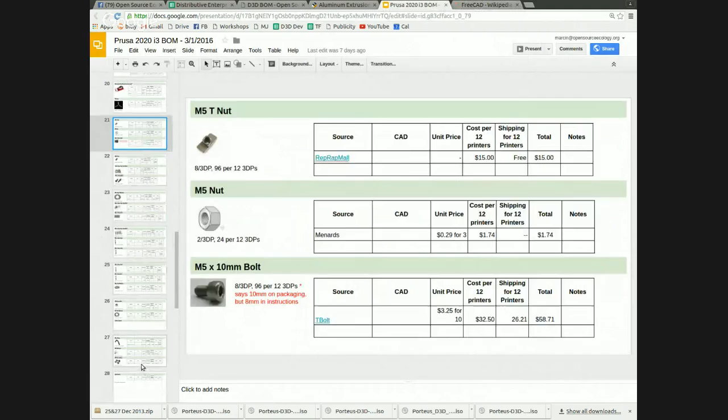So I just installed FreeCAD 0.16 today. Okay, here's FreeCAD 0.16. We can take the CAD files and import them into FreeCAD. A STEP file, for example, works, and then we can manipulate them. Like if we have the actual files for the extrusions, we can shorten them, lengthen them, rotate them until we end up with a frame.

So that's very useful. We actually have a very technical design available if we download the file from the internet. So in principle, whenever we can, we should not be trying to draw our parts by ourselves. They're primarily all standard commercial parts, and then when we start designing custom things like various sheets, we can insert them into FreeCAD. If you look at Wikipedia, FreeCAD is getting to be quite a decent package.

And for the collaborative activity to happen, access to an open source platform has to be there because you want everybody to collaborate. That's why we want to use an open source package. One thing we're going to do for the 3D printer and all the other machines is create workbenches within FreeCAD so that average people can get involved meaningfully in a design process where we develop the different modules, and those modules can be used within FreeCAD to do the design work.

I'm booting up FreeCAD here to show you how it looks. Let me look at that window there. All right, so I'll show you my entire screen here, but FreeCAD, get started with it.

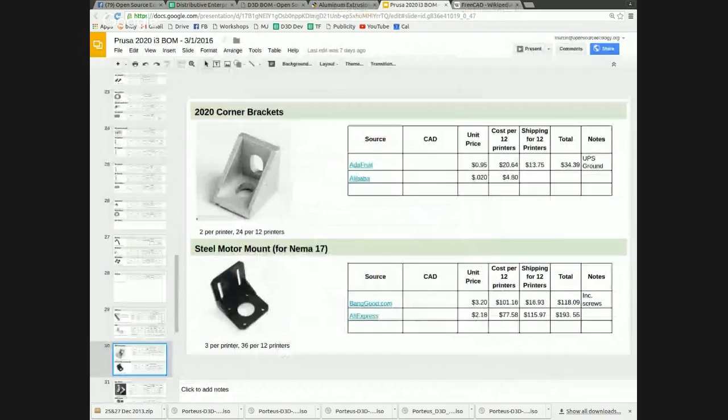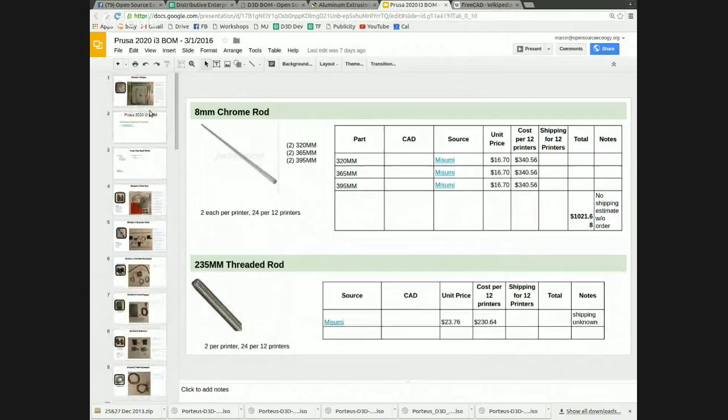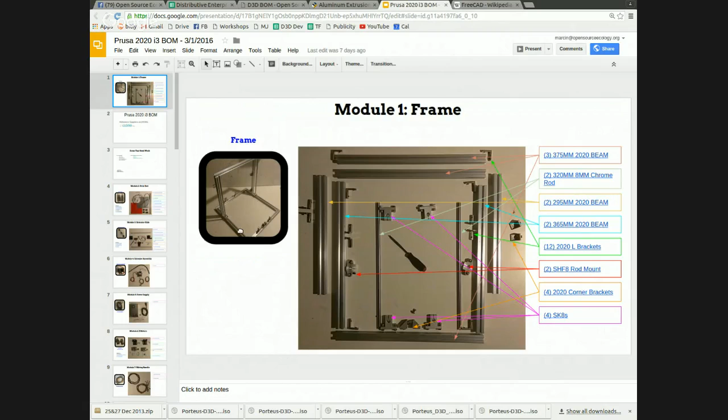So collaboratively, a large number of people can go into this document right here and go through all the parts and get all the CAD files together. And then we can do things like, if you go back to the modules, all the different modules, there's the frame. Well, if you have all those parts in your FreeCAD library, you can pretty easily go from this set of parts into a complete frame module. And you can do that for every single part.

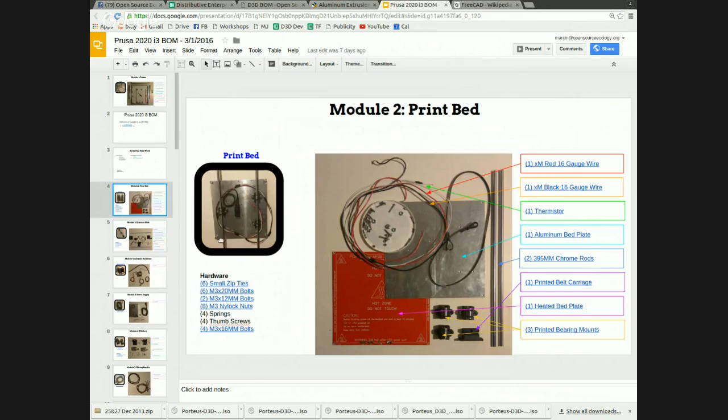So you've got all the different parts from your library that you have created, that we're all collaboratively creating. And next week, what I'll do is I'll actually show some of this in progress. This is just an introduction. So you've got the print bed, you've got all the other modules, so that at the end, you can build the entire 3D printer, which looks like, is there one of them here? Don't really have one in here.

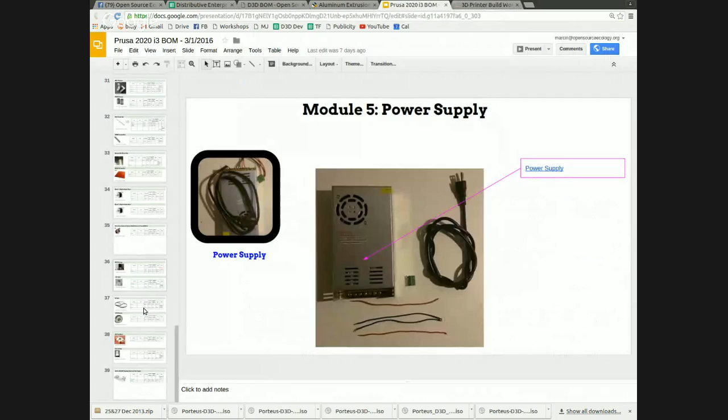So the 3D printer, if you go to our workshops page, you can see how the complete 3D printer looks. So that's the whole beast, but we're totally breaking it down. It's actually got 260 parts. The unique parts count is about 160, and we're going through this rigorous detail of all the parts that are there. Now, the promise of that is that imagine that we generate the entire CAD set of parts. We can do this for the Prusa i3 printer, which is what we're working with.

But the real thing is that once we have some of the parts, we can, first of all, start modifying them within FreeCAD. So some of the important things to do within FreeCAD is learn how to, once you have those fixed parts, if they're just STEP files or STL files, they're going to typically be dumb objects that have no parameters associated with them. That's one of the challenges of CAD. Whenever you transport between any two packages, you typically lose information.

So you can assume that a lot of times when we import something, like this piece here, that will be just an object without any dimensions. You can't scale it. So probably a lot of times we might have to take that and actually reverse engineer it, i.e. make it an actual smart object, meaning that FreeCAD understands it, meaning you can create the lengths and therefore you can scale it and so forth.

But the way to do it, you'd have to literally draw it out again. Perhaps you can take the front face of it and draw it again within FreeCAD, because the trouble is all that information is lost when you import stuff, so they really become dumb objects. So one of the main things to learn is how do you turn these into live editable objects where all the faces could be stretched out and things like that. Things are actually parametrized at that point, meaning you can scale them, modify all the points. So if we have all of that in FreeCAD, we can have a good number of people working on it.

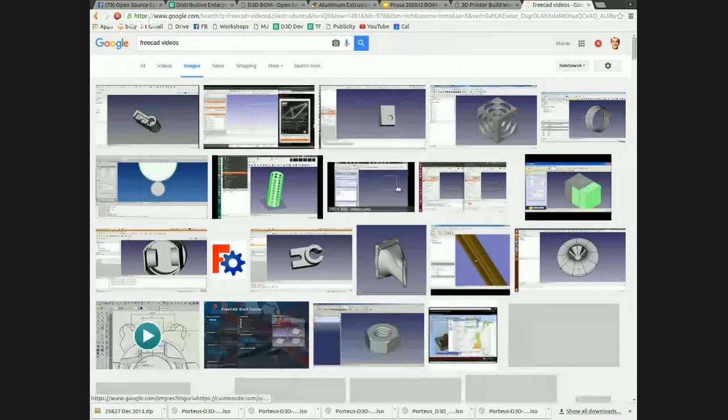If you Google FreeCAD videos, the good thing about FreeCAD is its extensibility. It's designed absolutely open source and modular, such that, let me see if I can see some images, one, you have the interface, but you can modify the interface to appear how you want it. I'm trying to find one example where they have a motor for an airplane that's actually moving, if you do things like kinematics, which is motion.

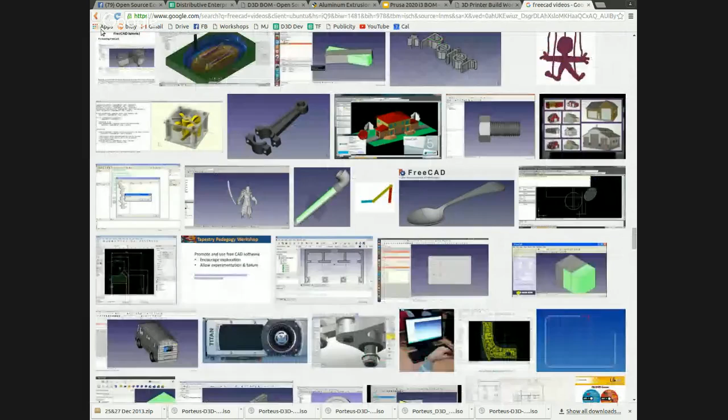The thing about FreeCAD is that you can extend its power quite a bit. Let's see, FreeCAD videos on YouTube. Yeah, there's plenty of videos that show some of the power of FreeCAD. There's one that shows a 3D engine actually moving. So you can use Python to make scripts. You can interact with the software through a command line as well. It's super extensible.

So that's why we want to use it and start creating our construction sets within FreeCAD. That's pretty much the main point about FreeCAD. So if we go back to, let me get my bearings here, the Collaborative Literacy webinar. I just want to make sure I cover everything.

Currently with the 3D printer development, think about the potential of what happens when you create a construction set as opposed to one design. What if you're designing module after module, modules that are scalable and modular by nature, so that you can modify. And further, if you use open source software, if you have all those files readily downloadable or accessible through a workbench where you drag and drop, then I would like to see thousands of people get involved in a design.

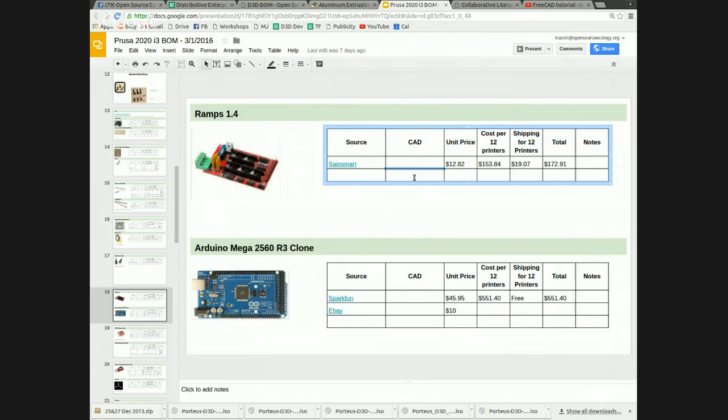So imagine we developed another machine and then we just break it down into all its parts. We download the CAD or access the CAD from online resources, with many people working together. With that kind of an approach, you can have a huge number of people working in parallel. So for example, instead of one engineer getting on SolidWorks and doing that over a week or a month of time, you can have that done within days. So once again, reducing the prototyping cycles, development cycles by factors of 10 or so.

So whoever sees this video, there's already a link within the Collaborative Literacy webinar to all the files that I'm showing here, like the 3D printer bill of materials. You can freely take that, and once we produce some of the instructionals, everyone can work on this together, if this is not already done. But try it to see how it works, get familiar with FreeCAD, and start manipulating it. We are going to generate instructionals for that. We don't have them yet right now.

We're pretty much starting with FreeCAD as a major transition this year, so that many people can work together. And if that's the case, that value proposition is pretty significant. Any average individual can actually get involved in a meaningful way. Not drawing stuff that doesn't make sense because you don't know, but picking up parts that are already proper and engineered. So of course, a screw is for real. If you have a CAD file, that's a real part of the design.

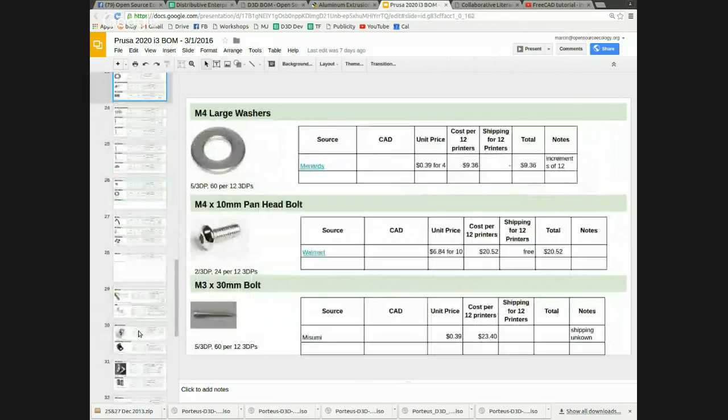Now if you put a bunch of these pieces together into a model, like with this tubing here, then you've got a realistic model. It's more than just the conceptual 3D CAD, and there's a big difference between the two. Anyone can draw a conceptual CAD drawing; it may or may not have anything to do with reality. If you're using parts that you've gotten from reality, then that connection to a workable design is so much closer. And that's why we want to pull actual CAD files.

And that's getting to a higher level, getting a little more rigorous or professional about it, that we're using the real technical design within all of our CAD work, down to the very tiny bolts. There's a huge difference between just a model that kind of shows it versus everything that is shown in there. Like we've seen, for example, with the Power Cube: it looked great in SketchUp, but we didn't have the actual library files. Power Cube 15.6 was one of the last ones. You can download our CAD.

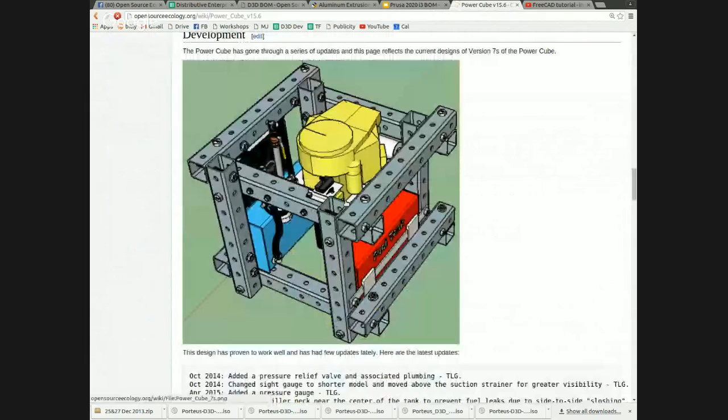Before, we were all working in SketchUp primarily, but it turned out that some of the parts didn't fit and we kind of had to go back to the drawing board. But once you start using absolutely real CAD, going beyond SketchUp, which is more consumer grade and more conceptual... FreeCAD does have the professional capacity to do everything that you need, so that when you do a design, it's a real design, and it's going to work because you've got actual real drawings there. So that's the advantage.

We invite everybody to take a look at this working document for this Friday. We'd like to get into a little more detail about actually having some of these parts. Right now I'm not working in FreeCAD because we don't have any of these files yet, and I'd have to learn how to do much more in FreeCAD.

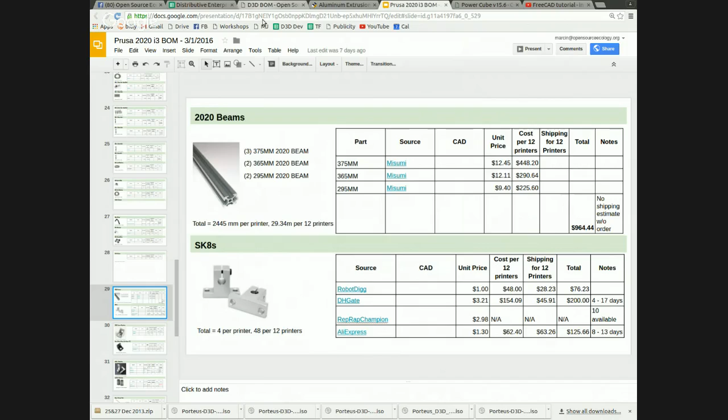So we're going to be generating the instructionals and the part libraries to do simple exercises that everybody can get involved in. So that's essentially the 3D CAD part. So that pretty much covers the CAD work right now.

Just to back up a little bit on the 3D printer, if you talk about the workshop right now, just for a little review on the current status, we've got 8 people signed up. There's still 11 days left. We're holding it at the Kauffman Foundation in Kansas City. But yeah, so far so good.

The major progress is on the bed leveling, which has just happened, and the next step on this is to redesign this so it's an enclosed machine that's much more highly modular. One of the big difficulties in this, you see, there's a lot of little tiny screws everywhere. For example, today we're actually playing with this part here, this belt holder, but man, those little screws in there are just tough to get.

And this adds to the time of build. Takes a little longer, but this is still going to be a one-day build. We were hoping that one person would be enough per team, but it really takes 2 people per team to get this within like a 7-hour build time. Outside of the talking and discussions, there's going to be about 7 hours of building, but it really will take that people work as a pair. And that's how we're designing the workshop, so that we can finish this.

A lot of the stuff is done in parallel when people work as a team. But at the end, when you have all the modules completed, then it's somewhat of a linear process to put them all together. But we're going to go from here to an enclosed machine with significantly lower part count, and getting into the scalability, so that the next machine that we build is easily changeable from this kind of thing to much larger.